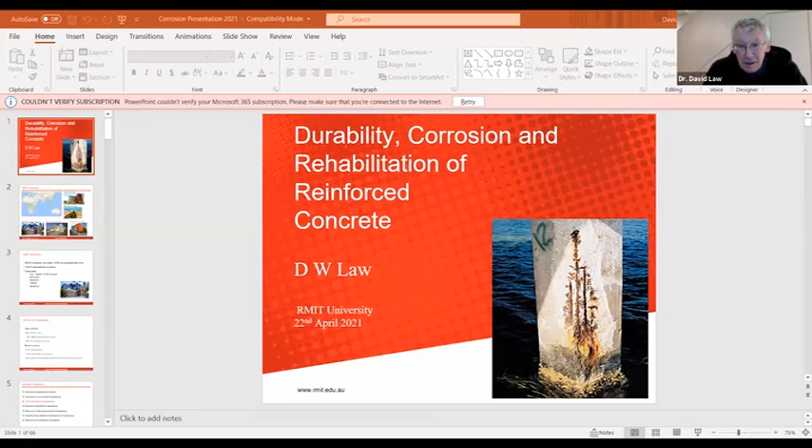Yeah, there we go. Yes.

So what I was going to talk about today is the work that I've done, both in industry, where I've worked in the UK and in Australia for a number of companies, looking at durability and corrosion issues for reinforced concrete primarily, and that's what I'll talk about today.

I'll talk a little bit about some of my experiences on those structures and the inspection of those structures, what is corrosion and what are the factors that affect it, and also a little bit about the research we've been doing, in particular at the end focusing on a current project where we're doing a lot of work looking at cathodic protection systems, many of which are now coming towards the end of their design lives, having started in the 80s and 90s.

Indeed, that's really why I'm working in this area, being more of an electrochemist, looking at corrosion and durability, and also the design and installation of ICCP systems in the early 90s in the UK.

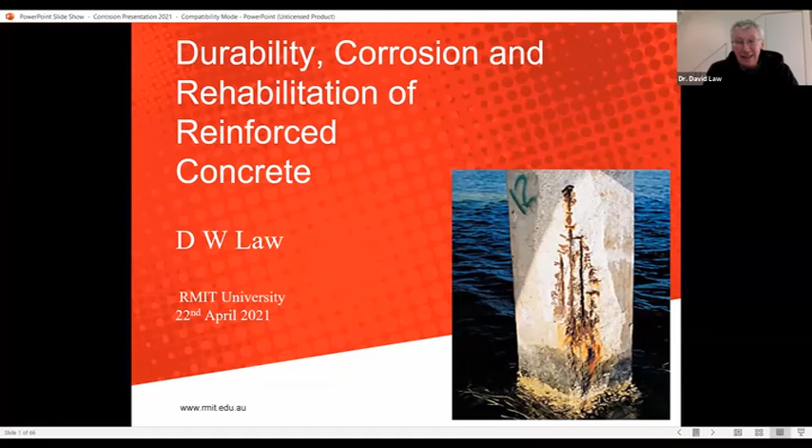So just to give people a little bit of an idea about RMIT University, we're based down in Melbourne, in Australia, though I'm actually British and from the UK, and have worked at Heriot-Watt in Edinburgh, which was my last university, and before that at Liverpool University.

RMIT has 3 campuses in Melbourne. We've got the main city campus, which is where our offices and classes are held, and we then have Bundoora campus, which is where our laboratories are held, and then we have another campus, the Brunswick campus, which is more for the arts and textiles area.

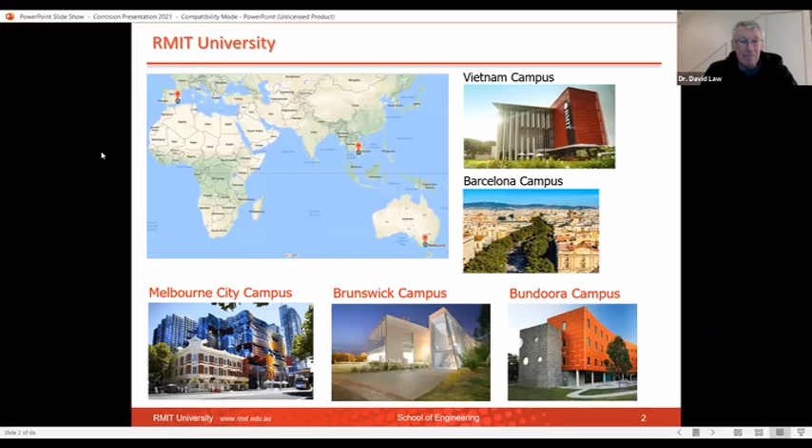We also have campuses in Vietnam and Barcelona, where we've also done some collaborative research with them. We have about 84,000 students, including 12,000 postgraduate in both research and taught, and we had 12,000 international students.

I'm not quite sure, given the current situation, what the numbers are actually like after this year's intake, but hopefully we will be back at those numbers relatively soon. The majority of these students are based on our city campus, which accounts for about 45,000 of the students. Within civil engineering, we have about 300 to 350 in each of our 4 years of our courses.

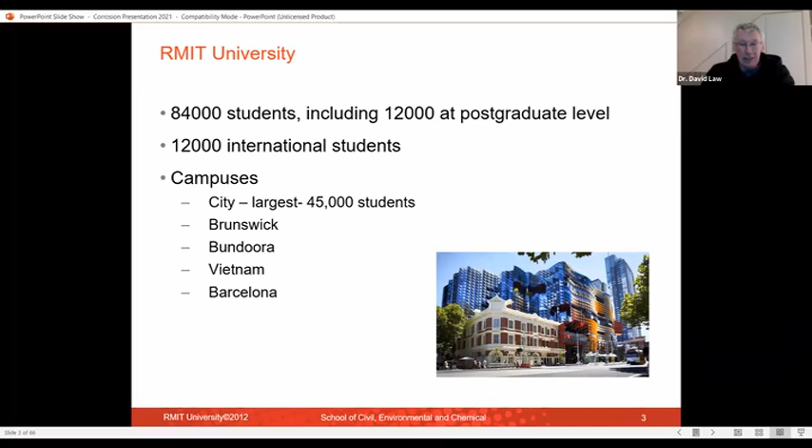Within the School of Engineering itself, which goes across a large number of different engineering profiles, we had 289, so nearly 300 academic staff, producing around 600 Q1 publications a year, with just under 5,000 undergraduates, and about 1,279 coursework postgraduates, and around 580 HDR students, the majority in PhDs. In civil, we have probably around 150 PhD and Masters by Research students.

I have, I think, 11 currently working with me, and a couple in the process of writing up at the moment. These are the academic disciplines within engineering, and I'm particularly in the civil and infrastructure engineering area.

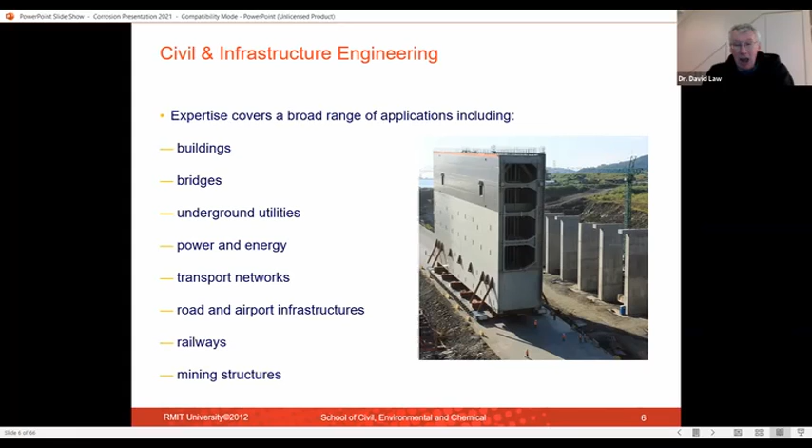But I do some collaborative work, particularly with the chemical and environmental engineering group. Within the expertise that we deal with at RMIT, we look at pretty much all types of structures. We're also very interested in power and energy, transport networks, and mining structures. In particular, I would say buildings, bridges, mining, and road are the main ones that I deal with within my research, from the area of durability, corrosion, and long-term performance.

So what I'm going to focus on is our corrosion and durability research at RMIT. I'll start off talking a little bit about the corrosion processes and how corrosion is initiated, particularly focusing on chloride-induced corrosion.

Then I'll look at some of the measurement techniques and testing that we have, in particular things like linear polarization measurements and laser scanning. We'll then talk a little bit more about corrosion and bond as well, and then I'll move on to focus on electrochemical protection with cathodic protection.

So why are we particularly interested in corrosion? Well, in the extreme cases, we can have major failures. And you may remember the Genoa Bridge that collapsed a couple of years ago, when there were a number of fatalities. And there have been other collapses, Minneapolis Bridge about 10 years earlier.

And we have issues with the Forth Road Bridge, where I used to be in Edinburgh. Major corrosion of the suspension cables led to having to construct a new bridge, which was opened in 2017, because of the potential disruption if that bridge was shut and there was perhaps a 50-mile detour required because it was shut.

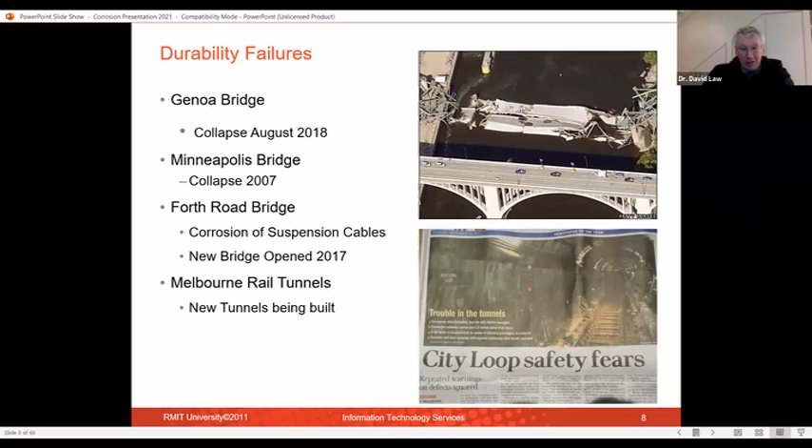So we're looking at this because we need to maintain this infrastructure. And if we have failures in this infrastructure, it's going to be a major cost to the repair, but also the disruption, even if there are no fatalities.

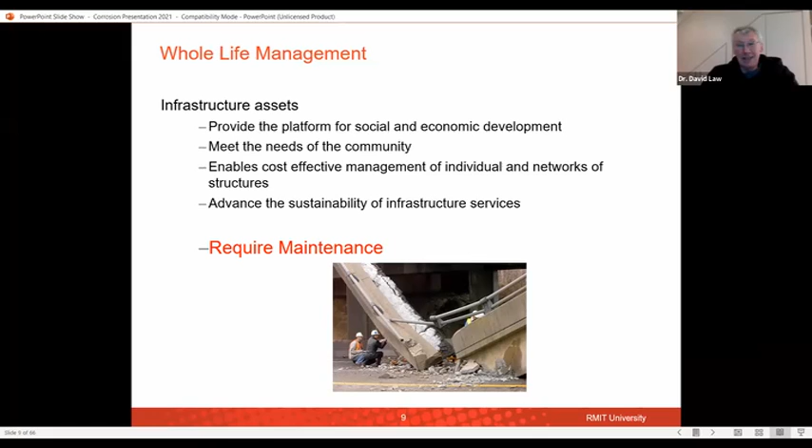The illustration there was a collapse overnight due to corrosion in the bridge, which had been caused by de-icing salts being applied on the surface, not an issue that you would have in Sri Lanka, but obviously in Sri Lanka there are other issues with it being an island and much of the infrastructure built in a marine environment where you've got the chlorides that can get in and cause deterioration. And higher temperatures and high humidities can also drive that corrosion even faster.

And it costs a lot of money. There was a survey in the USA in 1982 that identified 15% of all the bridges at that time, which was over 500,000, were structurally deficient. And the estimated repair costs were 8.3 billion a year, equivalent to 0.1% of GDP. And that hasn't really changed much in the last 30 years.

There was recently a study done in Sweden, and that estimated the repair costs were 0.08% of GDP. So those repair costs are staying fairly constant, but things have the potential to get considerably worse. At the moment, approximately 40% of the bridges are over 50 years old, the age where we might expect durability to be a problem. By 2050, that will have risen to 75%. So that is going to be an awful lot of money that will have to be spent.

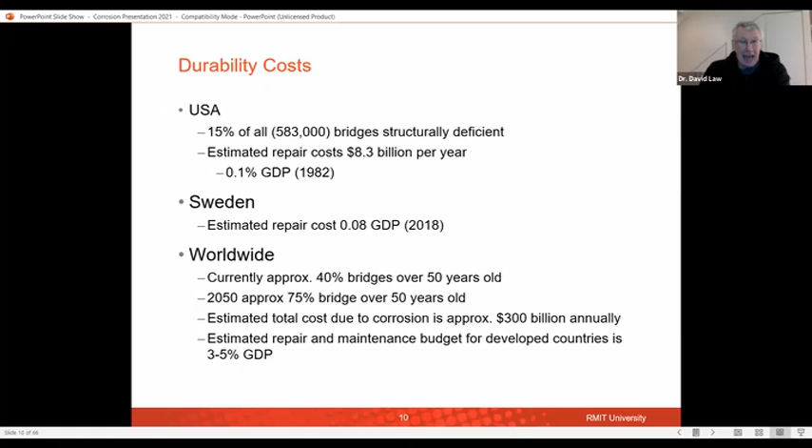And it's estimated that if we extrapolate this to all structures, we're looking at around $300 billion annually worldwide. And in most developed countries, I expect this to be around 3 to 5% of GDP for all those structures.

And here is another example where we've got durability failure of steel pipes, mainly water pipes. In the US, it's expected that might be 1 trillion over the next 25 years. In Australia, we have estimates of just under 125 million over that same period. And these leaks, which might seem small at the start, can progress to what we see in the image below if they get out of control.

And with a lot of this durability, it's very difficult to see what's happening because it's steel that may be buried, it's steel that's within concrete. How are you going to be able to test this? How can you repair it? And how can you design for it? Indeed, the selection of your concrete, your concrete mixes and the cover depths is very important in how you're going to try and prevent these failures.

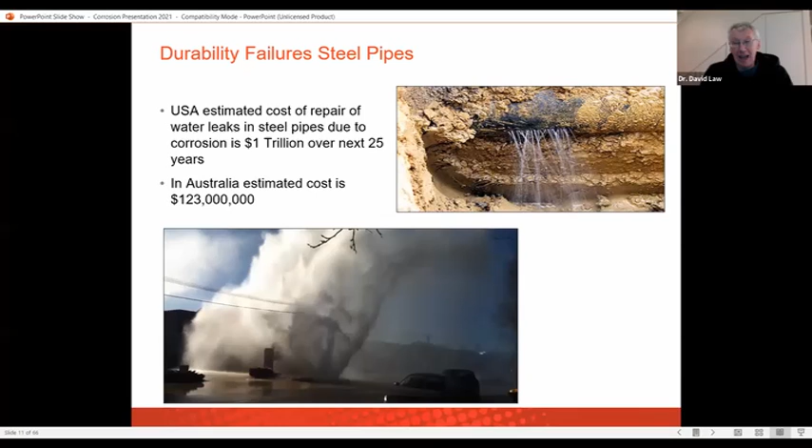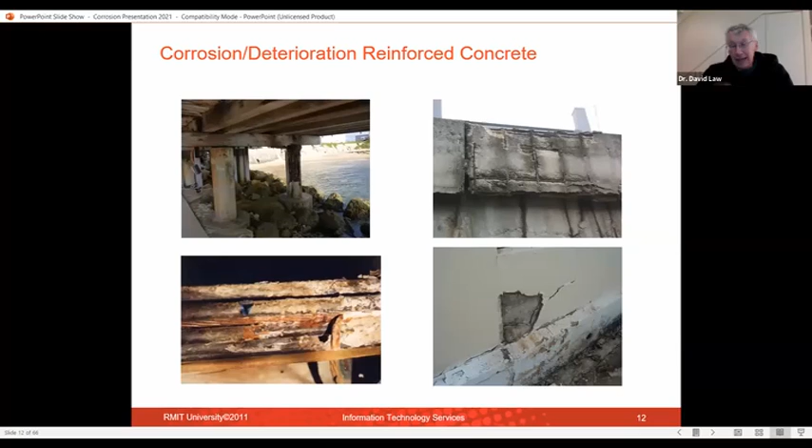This is the sort of thing that you see on old structures, and I've got some examples here of what happens when you have corrosion of your reinforcement. The top one here is a marine structure. This is actually a bridge in Central Europe, and that's due to de-icing salts again. The bottom one is also on a bridge, and is due to water leaks that are coming through and initiating the corrosion inside the concrete.

So how does chloride get into our concrete? Our chloride may come from de-icing salt or from seawater, and it will slowly diffuse into our concrete. That is, it will come into the pore water within our concrete, and it will diffuse under the concentration gradient of chloride ions until it reaches the steel bar. And once it reaches the steel bar, you will get corrosion initiated.

And thus, the protection that you've got is your concrete. You've got the distance, the cover depth, and the density or compaction, the porosity in that matrix, because it will diffuse through the interconnected pores and the pore water. So that is how you can try and design out chloride attack. But when the chloride ions come in, they will reach a concentration at the steel rebar that will initiate corrosion.

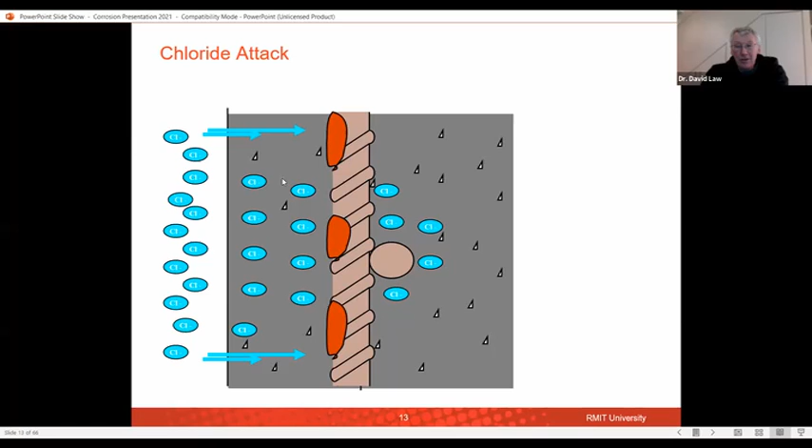And this is what happens. You set up an electrochemical cell. You have an anode, and that's where your iron dissolves from your steel. So your Fe goes to your Fe2+, and you have 4 electrons generated. And these move along the rebar to an area on the bar that we would term the cathode.

And here that reacts with water and oxygen to form hydroxyl ions. And thus we need both water and we need oxygen at the bar for that reaction to occur. And then these hydroxyl ions will be transported through and create the full circuit. They will meet the ions that have dissolved, and we get iron hydroxide forms. This then changes into the rust, and you see that typical orange rust that you see on the surface.

This occupies a larger volume than the steel, because the steel is now combined with our oxygens or our hydroxyls, and so it puts a stress on the inside of the concrete, and so the concrete will collapse. And you will get cracks, you will get spalls, and you will get failure of your concrete. And that is how our steel corrosion is initiated when we have our chlorides.

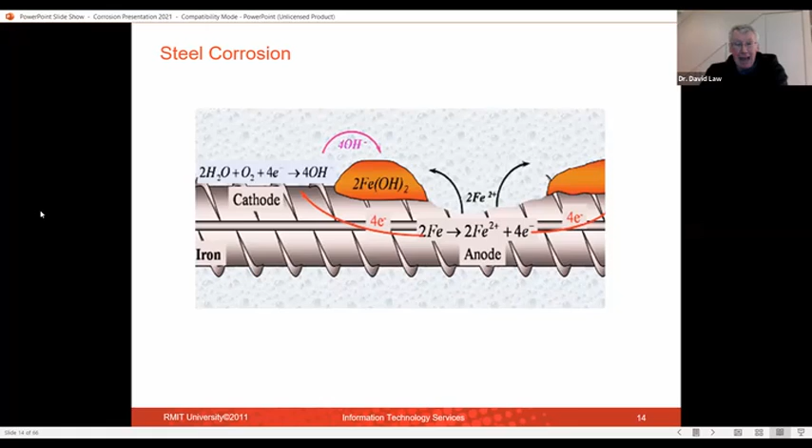And why does it happen? Well, this is a Pourbaix diagram. And when we have our normal concrete and our pH, we are in sort of this pH 10 to 12, 13 zone, and that is where we get passivity. That is, we will have an iron oxide film formed on the surface of our steel, and it will protect our steel because of the pH that we're at.

However, if we have a drop in our pH, or we have chloride ions coming into the system, we move from a passive region into an actively corroding region. And so that is why we start to get corrosion. As the chloride ions increase, or the pH drops, which happens when we have carbonation attack, and that neutralizes our pH in the concrete, we move into our corroding area. And that's where our Fe wants to move to our Fe2+. And so that is a problem that we've got.

And while I'm here, just to mention, you've got this area of immunity. And you can see these are at very low potentials. So when we have a steel potential and it's passive, it's generally in the region, say, minus 100, 200 millivolts. When we move into the active corroding region, we're moving down into lower millivolts, which are generally 300, 400, 500 millivolts. But if we get to very low potentials, we actually get immunity. And this is what we do with cathodic protection that I'll come back to at the end.

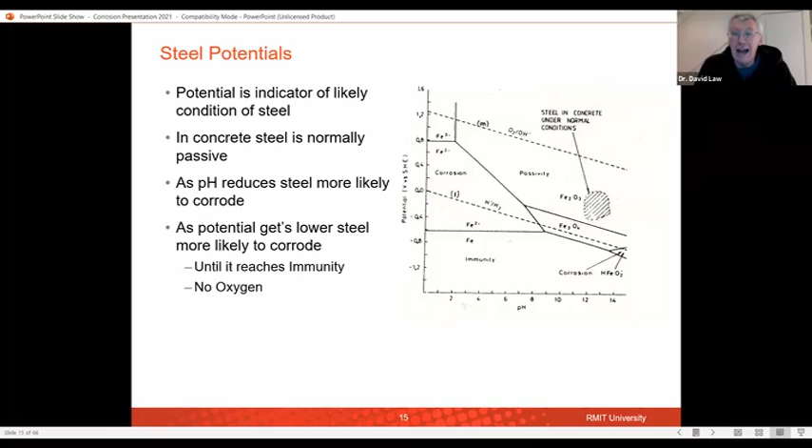And it's that steel section that provides the structural support. And so you're far more likely to have those failures with chloride attack than perhaps you would see with carbonation attack. And when you've got this corrosion, these cracks form. And so if you have beams, the cracks tend to come out at the corners, and the concrete falls off, you have spalls, and you get exposure of your steel, which can then corrode faster.

When you've got slabs, it can quite often be that you'll see the bars will connect up with those cracks, and you get larger, flatter areas of spalls coming off, and that might be in the soffit, or it might be when you've got the slab on a bridge deck coming off with them.

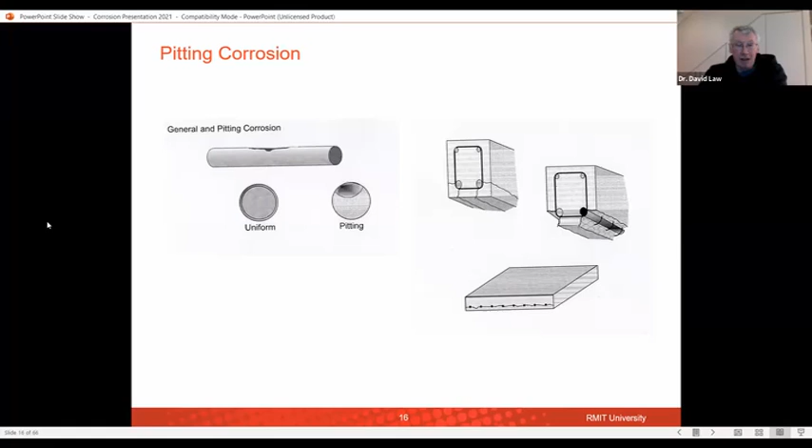But I said it's this pitting corrosion that is a real problem when you've got chloride-induced corrosion. So how do we go about assessing this? How do we know what's happening at our steel if we can't see it because of the concrete?

Well, we can look at what's called half-cell potentials. That is, we can look at what that steel potential is that we talked about in the Pourbaix diagram. And from that, it will give us an idea of whether it's passive or whether it's corroding. We can do what are called linear polarization resistance corrosion rate measurements. We can get an instantaneous rate of corrosion.

We can also look at resistivity. What's the resistivity of our concrete? If we've got a lot of chloride ions in there, the resistivity will drop. If it's very damp, if it's moist, the resistivity will drop. And we can also look at what is the chloride diffusion coefficient? What's the rate that our chlorides are coming in through our concrete?

And one of the things that we do when we have a mix design, we want to have a chloride diffusion coefficient for that concrete that is very low, which means that if we have a set thickness with that chloride diffusion coefficient, the chloride ions are not going to reach our steel within our design life. And to do that, we can use some predictive modeling to see whether it's going to reach our steel, and we can design to try and ensure it doesn't reach our steel.

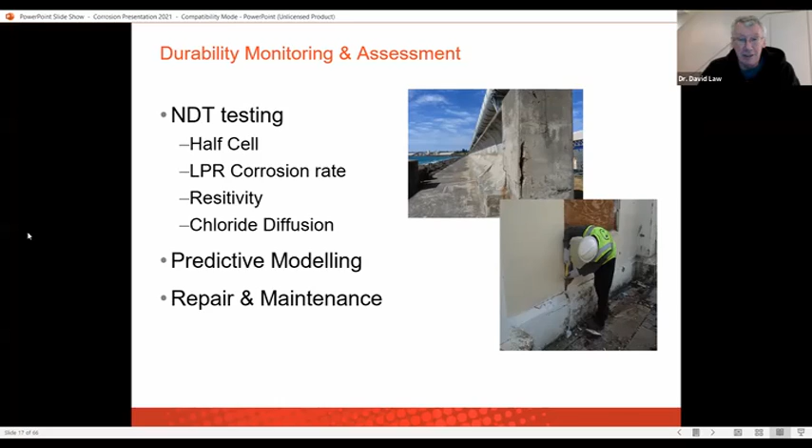But sometimes it does, particularly as structures age or the exposure environment is actually more aggressive than we thought, or it can even change. And so we need to think about how we're going to repair and maintain these structures. Well, for those techniques, the most common technique is to do a half-cell survey.

And to do this, we would have a half cell. That is a standard electrode that we are going to use to measure the condition of the steel. Generally, when we're doing it on the surface, like these guys here, we would use a copper sulfate electrode because it's pretty robust, so it can take the knocks, and it will give you a pretty good idea of what's going on, perhaps plus or minus 5 millivolts in accuracy.

If we want to monitor this over a long period, though, we may well want to actually install an electrode in the concrete and see what's going to happen over a number of years, perhaps 20, 30 years even. And for this, we can use things like silver chloride or manganese oxide electrodes that are more stable and will last longer inside our concrete, whereas our copper sulfate will not last that long because it will dry out if we try to install it inside our concrete.

To do these surveys, we need to have a connection to the steel. So that may well mean that we need to break out with a drill or a hammer to the steel and make a connection to that. We then need to set up a grid on the surface so we can record it at set points. And we can see the people are putting them on at these set points on the grid, so we can build up a contour map. And we take points along there.

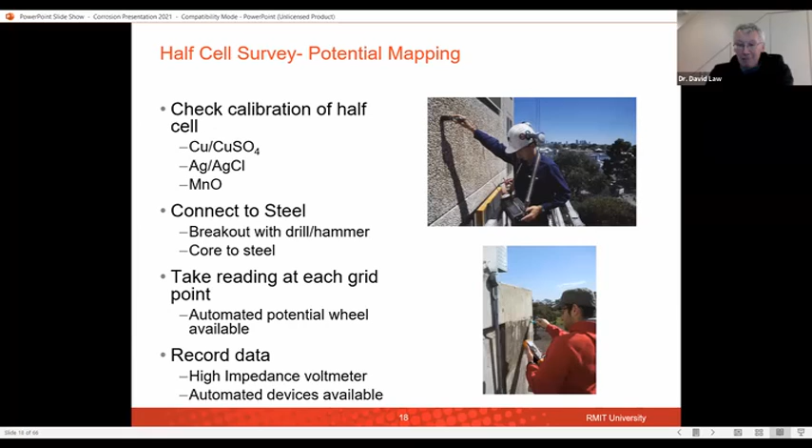You can get potential wheels, but it needs a fairly flat surface to be able to roll it along. And you also need to use a high impedance voltmeter, or you can get some of these automated devices, such as the one at the top, where it just records each time it's put on the surface. At the bottom, these were some of my research students, and they would read out the number and someone would write it down to produce that information.

And then we get these contour maps. And you can see here, we've got these green zones where the potentials are more likely to be in the passive range. And then we've got these red and yellow zones where they're more likely to be in the active range. And thus the green is probably the cathode, and the red and the yellow are where we've got anodes. And if we can't see any cracks or rust yet, we're suspicious that we actually have got corrosion going on.

And so these are the areas that we might want to look at in more detail to measure the corrosion rates and see how fast that steel is actually corroding and whether we can do anything about it. And we can look at these with a set of criteria that relate the steel potential to the likelihood of corrosion that are called the Van Daveer criteria.

We can look at the shape of these corrosion plots. If they're all of the same sort of potential, then it's likely there's no corrosion occurring. But when we've got these big contours that go from green to red and yellow very close together, then it probably does mean that we've got corrosion there.

And we're also looking at those environmental conditions. In Australia, for example, if you're at the end of summer when it's been very dry, there'll probably be no corrosion because there's no moisture or little moisture. Equally, if it gets in the monsoon season, there'll probably be no corrosion because there's no oxygen present. So you need to think about, well, what's the environmental condition when I'm taking these readings?

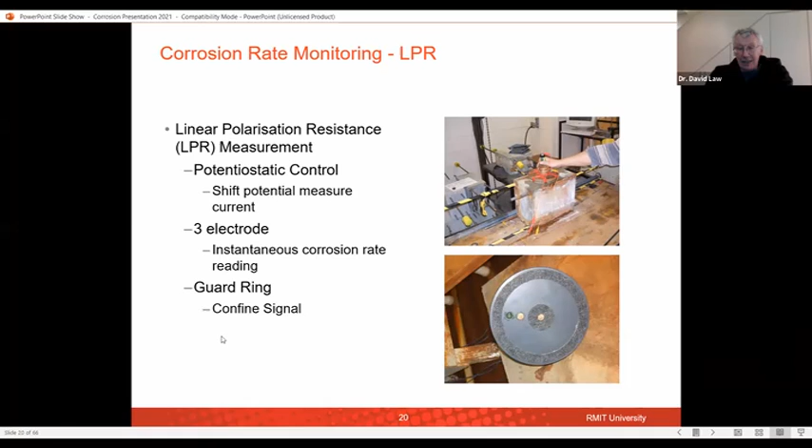The linear polarization resistance is a method of actually determining the corrosion rate. This looks at changing the potential and measuring the current when you change the potential. You can have a 3-electrode system, which is the most common, and I'll talk about. You can also have a guard ring, the bottom one, which has 2 extra electrodes to see that the potential that you're changing is not going outside a certain area, so you know the area of steel that you're dealing with. In general, these days a 3-electrode system is more normal, but you can use guard ring systems to ensure that you've got a set area of steel that you're measuring.

This then is how a 3-electrode system works. You've got your reference electrode. In this case, we've got silver chloride, but you can use a copper sulfate. We've got the steel, which is connected, and that's termed the working electrode, because that is the one that the work is done on. And we then have an auxiliary electrode, which will apply the perturbation to move the steel potential. That will apply a small current that will shift the steel potential by a set amount. And we then measure the current response as it returns to its equilibrium potential.

For the auxiliary electrode, we need a conductive foam to get a good contact, and we will generally use a brass plate that is less likely to corrode and will be more long-lived, but you could use any metal there if you wanted to.

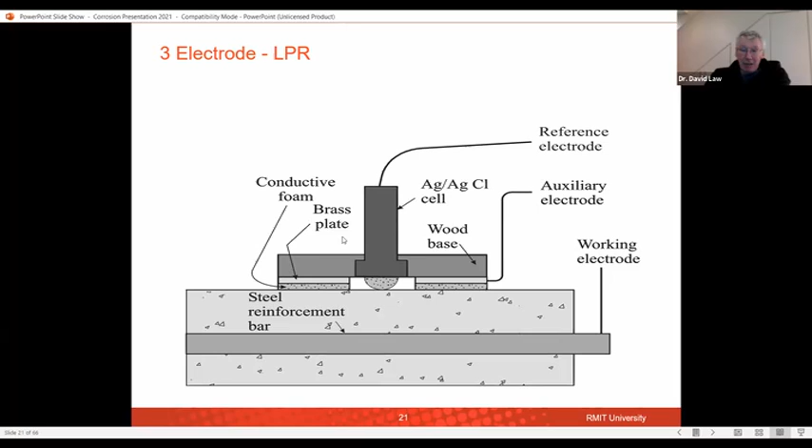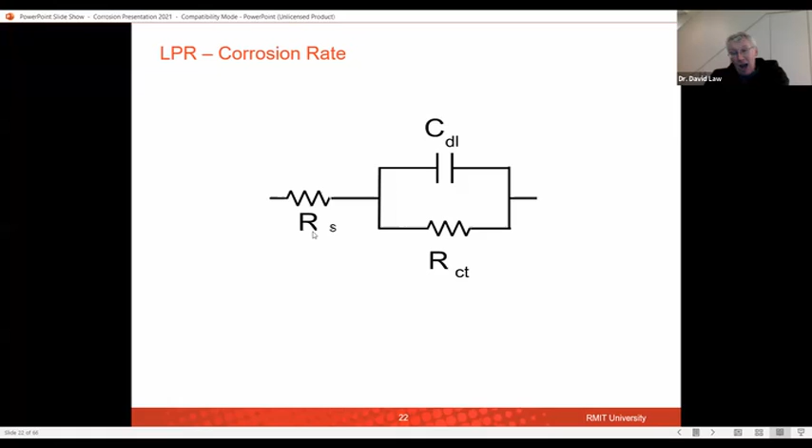And so you can actually measure this with your LPR, because it will measure the 2 resistances added together. But because you have a capacitance here, if you use an AC impedance measurement, you can short that out. So you will just measure your solution resistance, because it will go along this side of the circuit with no capacitance and not go through the RCT resistor. So you can measure your RS, and your RS plus RCT using this LPR technique.

And here you can see me in the days when I was working for AECOM in Australia, undertaking a sort of corrosion rate measurement. So what we did, we've done a cover survey, we've made a connection to the steel, we've done a half cell survey and identified those negative points, and now we're going to do a corrosion rate measurement on that.

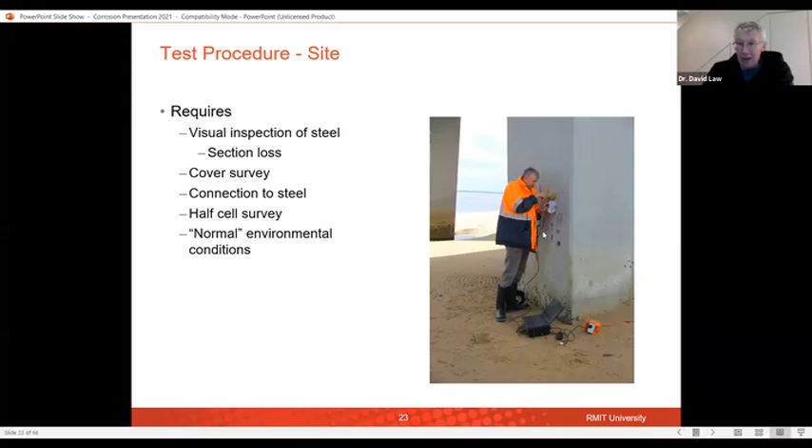At that point, you can see the tide comes in. It doesn't actually come up quite that high, but it's in a very aggressive environment because you will get the moisture, you'll get some spray and some splash, but it'll also be drawn up by capillary action. So this is a very aggressive location.

And this is what will happen. So we're going along and the steel is sitting happily at its normal steel potential. And then you change the potential up and you change the potential down by applying that current from the auxiliary electrode. And over time, you'll get a charging up of that double layer capacitance. And when that's charged up over time, it will reach an equilibrium point.

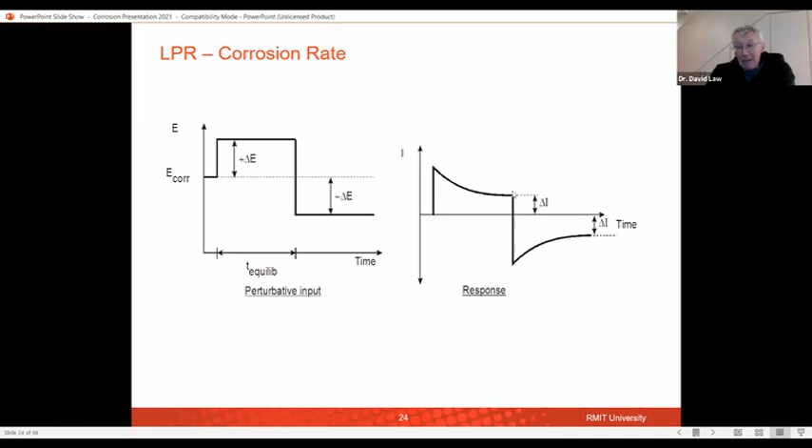And so you've got your delta I, the current that relates to your solution resistance and your charge transfer resistance. You know your delta I and you know your delta E, and we know that V equals IR. So we can calculate our polarization resistance, delta E over delta I.

And we also know that we can calculate our solution resistance separately. So if we subtract our solution resistance from our polarization resistance, we will be left with our RCT, the resistance that relates to our corrosion at the moment we took it. We then can correlate that with our corrosion rate using a constant, which is the Tafel constant.

And if we then divide that instantaneous corrosion rate by the area of bar underneath it, and that's why you sometimes use that guard ring, we can then calculate our corrosion current density. And from our corrosion current density, we can then use the Faraday equation to calculate how much section loss we're getting in our steel per year. And thus we can see how much steel we're actually losing per year.

And so we can see how long before we will actually get structural concerns about that steel. And that, as I said, is the Faraday equation. We've got the atomic weight of iron, the density of steel. We know it's 2 plus because it's Fe to Fe2+, and we've got our Faraday constant.

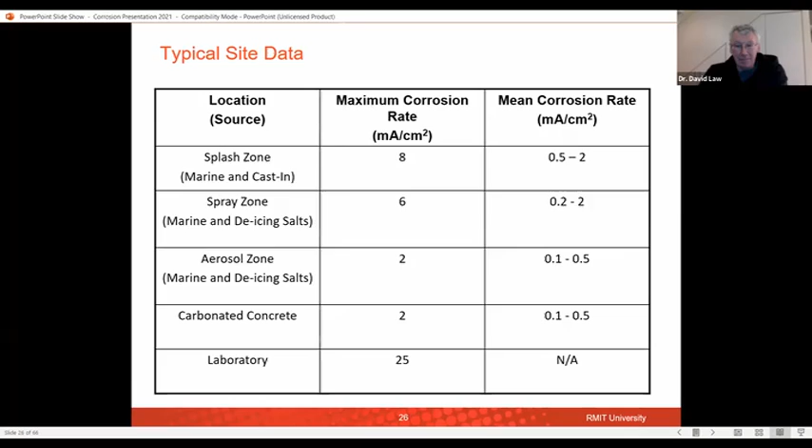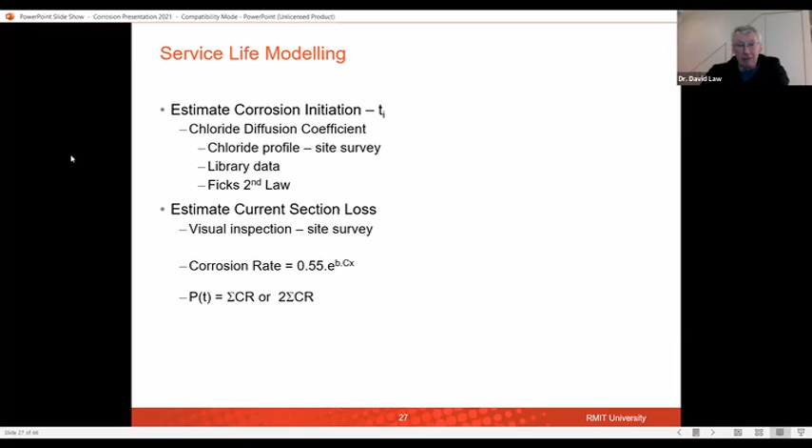So this is how we can go through and estimate our section losses, and our corrosion rate can then be correlated to how much we lose over a longer period of time. So there are various ways that we can then go forward to estimate the service life of our structure based on the information that we get from our corrosion rates.

And thus, in the end, we can get actually to our residual section, which is the main thing we're interested in. And so this is the residual section of our steel that is related to our penetration depth. So we can get what we say is our time to cracking, and we can get, most importantly, that time to failure that we can try and estimate from our corrosion rate measurements.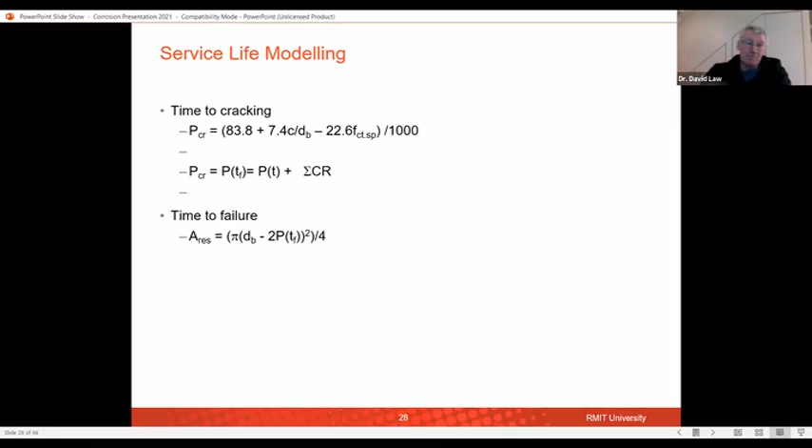Another interesting technique we've been using is to look with a laser scanner to try and detect deterioration on a structure. We had a block that we put in the laboratory, and we're actually corroding this by applying a current to make it corrode faster and spraying it. We are monitoring over time using a terrestrial laser scanner.

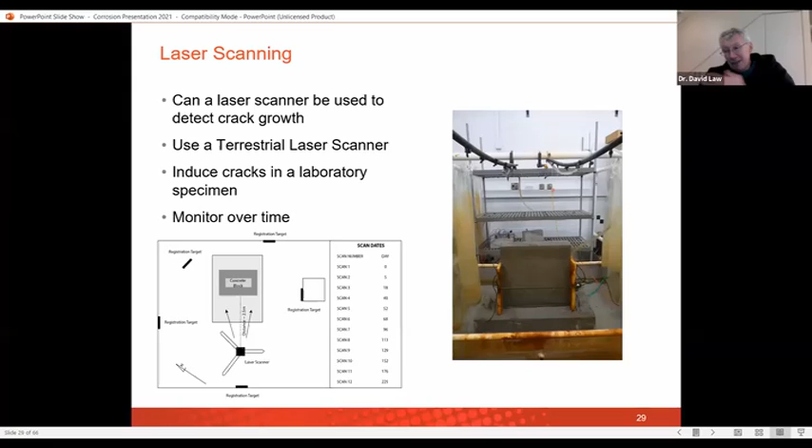We also went down and scanned a seawall to see what was happening on a real structure. We did this because we wanted to get the data in a shorter period of time. We did the scanning over a 2-year period, but it's still ongoing now. It's been going about 5 years, and we occasionally go down and deal with this.

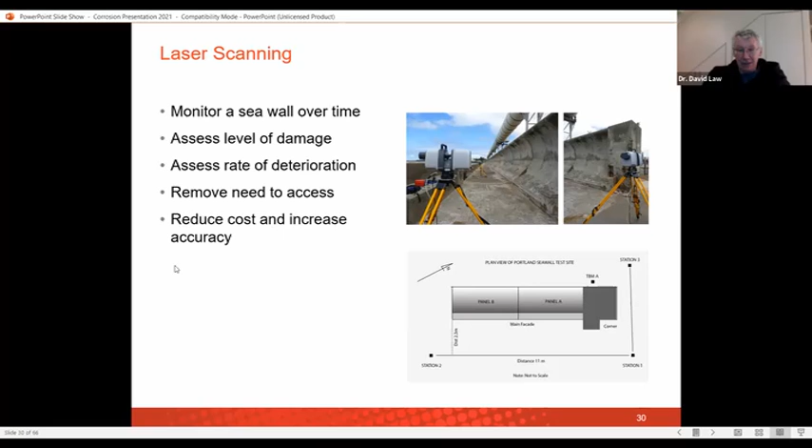The idea being that if you can scan it, we're getting reasonably close, but you may be able to do these scans from a long way away. So you don't have to go and actually do the visual inspection where you get right up to a structure. You can simply do these scans from a distance, or even these days use a drone to do these scans.

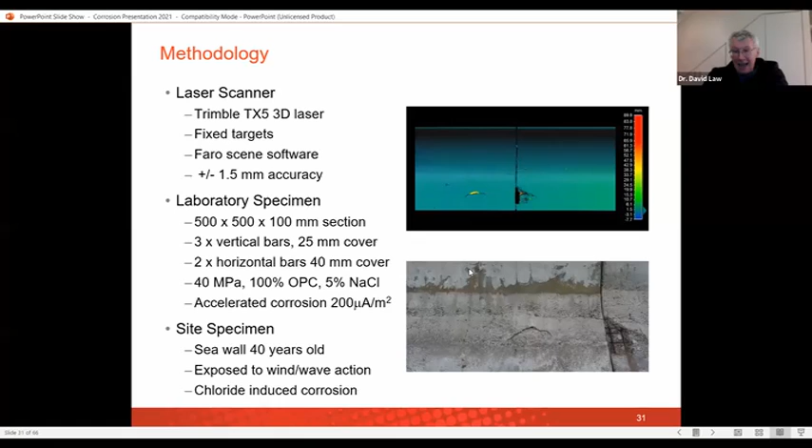So it can reduce the cost and hopefully increase the accuracy. These are some of the data that we had. We had a set of bars in our laboratory specimen, put in 5% sodium chloride, and accelerated our corrosion with 200 microamps per meter squared. That seawall was 40 years old, and it's got quite bad chloride-induced corrosion in it.

Thus, we were able to do a set of scans, and you can see here where we can use the resolution of our laser scanner to pick up the crack patterns that we got on the blocks themselves. You can see here this is what it looked like in the lab, and this is how we can enhance it using our laser scanner.

What we found is that we needed the cracks to get to about 0.5 millimeters before we could really follow them with the laser scanner. This is because with very small cracks, the laser scanner was getting lost and not being bounced back accurately enough to be able to see them. But once they got to 0.5, then we could produce these maps that we could see. This is a very good way of seeing where the cracks are, and we can then monitor the crack growth over time using this technique.

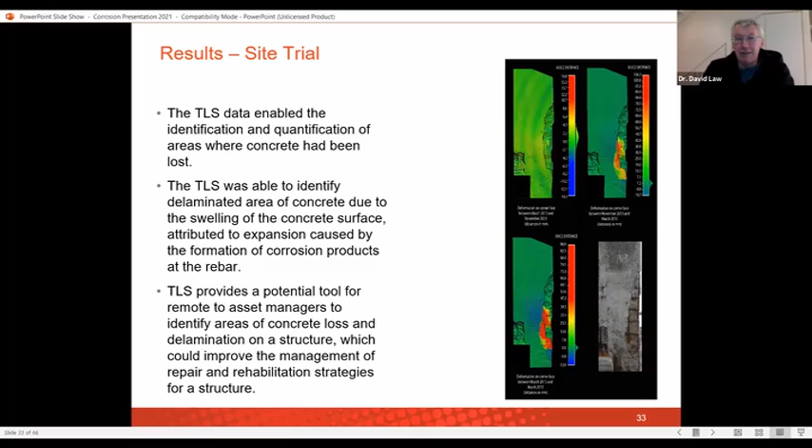So another thing that we've been looking at is what happens with the corrosion and that bond to the steel.

We're very interested in the bond of the steel, because it's that composite action that gives strength to your structure and the capacity remaining. We're interested in whether there's a relationship between crack width and bond. Because if we can monitor the cracks, we might be able to understand how much bond we're actually losing within the structure.

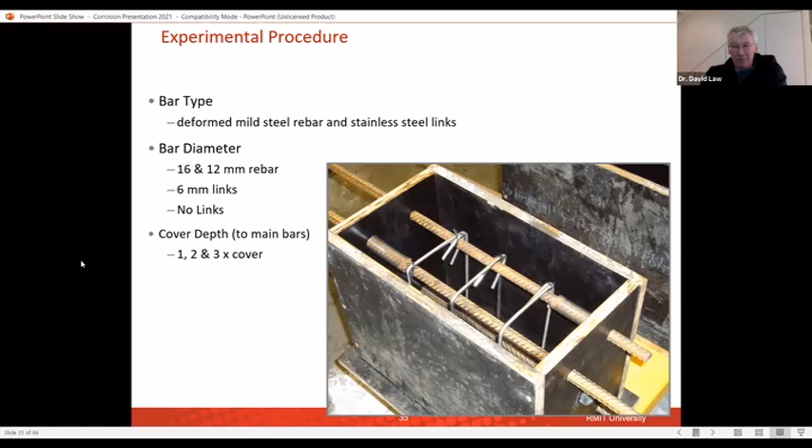We looked at a range of cover depths of 1, 2, and 3 times the cover of the bars over a large set of specimens. We would then clean the bars so we could see how much mass loss we were getting out of them. This would then be accelerating the corrosion within the bars, and so we would have these bars wired up, and we would be able to do pull-outs of the bars.

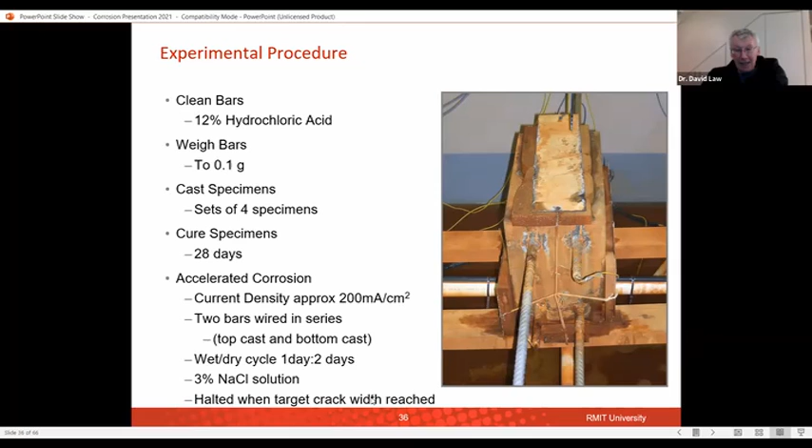We had them with the long bars opposite so we could fit them in the machine. If we had all 4 bars in, we couldn't fit them in the machine to pull them all out. In this case, we cast them with 3% sodium chloride, and we had wet-dry cycles running for 1 day wet, 2 days dry, and we would stop these at specific crack widths to test what the bond was on them.

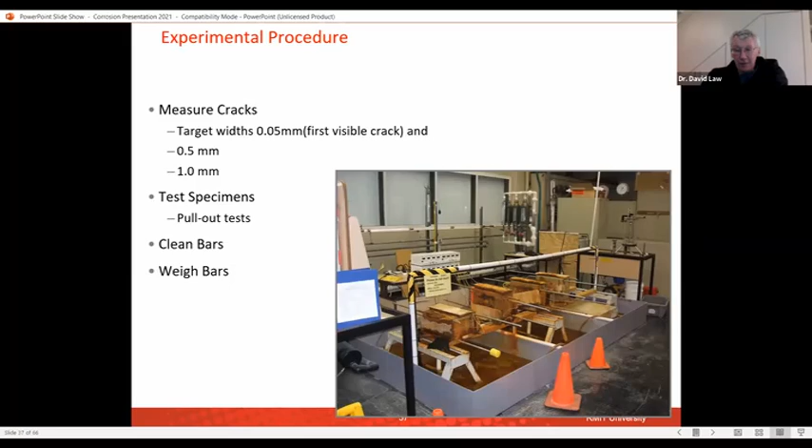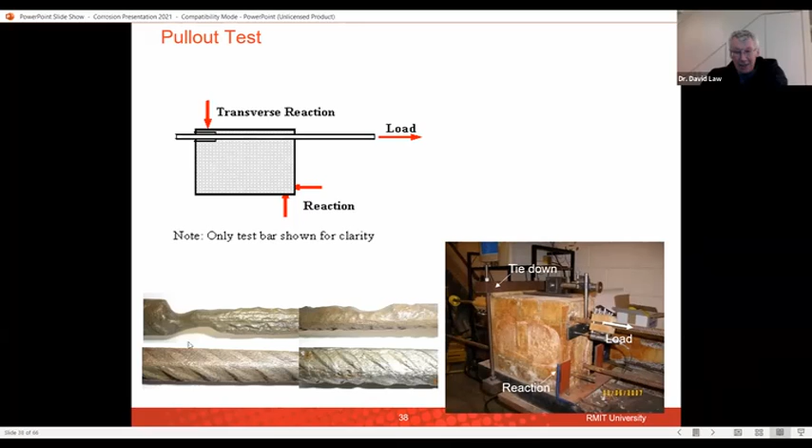This is how we would do the test. So they're clamped, but we've got that bond breaker here to make sure there's no reaction, and we pull them out in a perpendicular direction, and this shows you the section of some of the bars that we took out.

Here, typically after cracking, after bond failure, we get these cracks, and here we have another one where it comes straight out, where we've just got the longitudinal cracking. This was typical for unconfined. This was typical for confined, as you might expect.

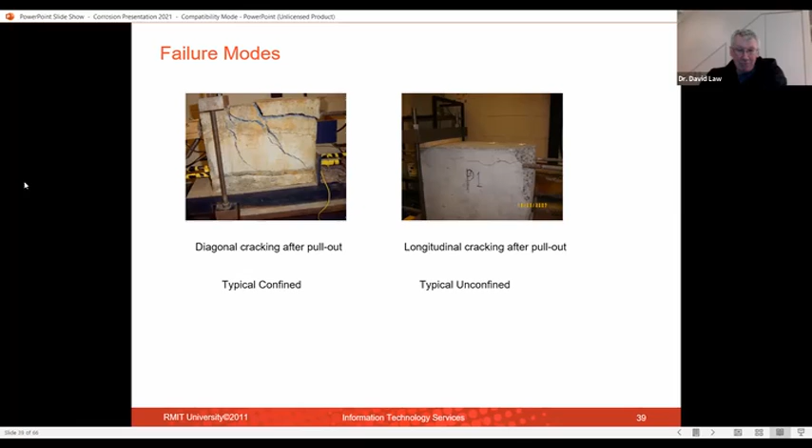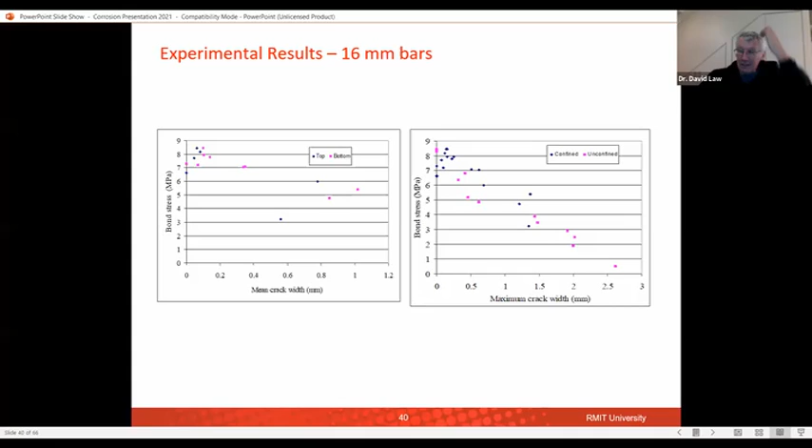You can see here, this was the mean crack width, and this was the maximum crack width, and again the maximum crack width gave us a better relationship than mean crack width on that deterioration. So there was a suggestion, and this is still ongoing research, but simply by being able to monitor and measure those crack widths, we will get an understanding as well as to how we're losing bond from the bars.

So the final bit of work I was going to talk to you about is the cathodic protection systems that are used to rehabilitate structures. This would be, I would say, the most common method of rehabilitating chloride-induced corrosion on structures. There are 3 different types of cathodic protection.

There is the impressed current cathodic protection that uses an electrical current to protect them. These are the ones that are most used, and they've been running now for 30, 40 years. These are the ones we've been studying to see, as they're reaching the end of their design lives, whether we're seeing protection left on the structure by the action of this cathodic protection over that long period of time. Because if it is, it means those structures will last longer, and so we don't need to reinstall ICCP, and they may well reach their design lives. Understanding that in the different locations and elements is very important now, as there are a lot of these systems at the end of their design lives.

You can also have the sacrificial anode systems, where you use zinc to protect them. These are easier to replace because you can just add more zinc, or replace the zinc if you need to, but they can have more problems putting in enough protective current to protect your system.

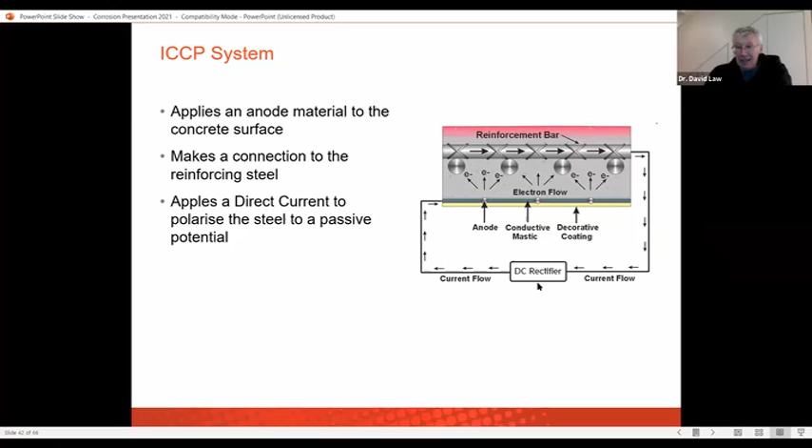If our steel bar is repassivated, it will be a period of time before corrosion is reinitiated. The idea behind the hybrid is that if you've got some zinc, it will then be able to protect it, and you will not lose that passivation now you've got it, for an even longer period of time. But ICCP applies this DC current for a long period of time—these systems run for 20, 30, even 40 years now. When you're talking about hybrid, you're probably talking about 6 to 8 weeks, using large batteries to apply that current.

To be successful, you need to repair all of the spalls and delaminations to ensure that the current circuit can be set up and those anodes on the surface actually work. You also need to make sure that all your steel is connected into the system, or it will corrode if it's not connected. And you also need to make sure that your concrete, both the original and the repairs, allows current to flow. So you don't really want polymer modified concrete in there, because that's going to make it a lot more difficult to actually pass the current through your concrete.

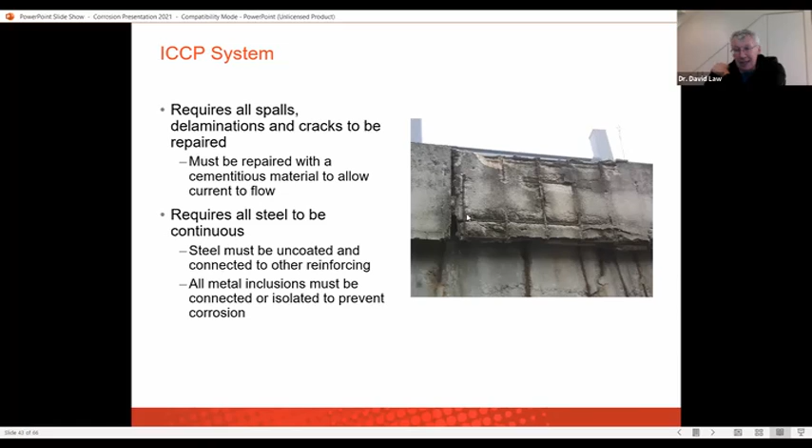And of course, your steel needs to be uncoated. So you can't be looking at this if you've got epoxy coated bars in there. So you work out your total steel area, and then you would typically apply between 2 to 20 milliamps. And when I started this in the late 80s, early 90s, we would rack it up to 20 milliamps and leave it there because we weren't sure it was going to work.

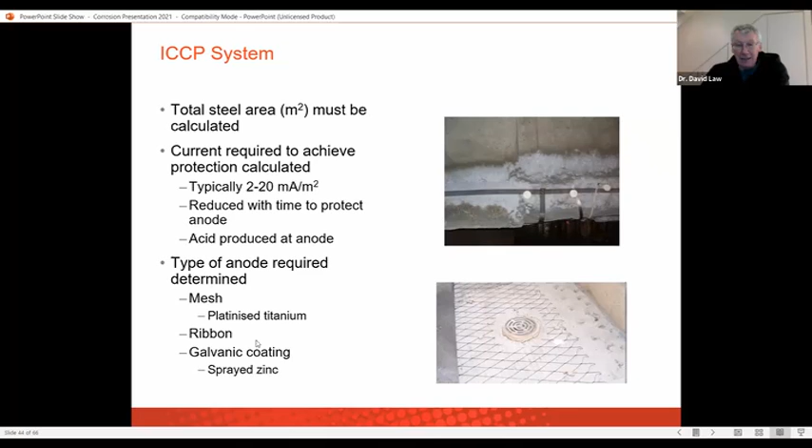So platinized titanium here, and as I said you can also use a galvanic coating or a conductive carbon coating, even as a paint. The mesh, usually you can apply the most current. So if you've got a lot of steel, it'd be mesh. Then you may go down to ribbon, and ribbon obviously can be slotted into quite small areas as well. And then if you don't need too much current, the conductive paints can work quite well.

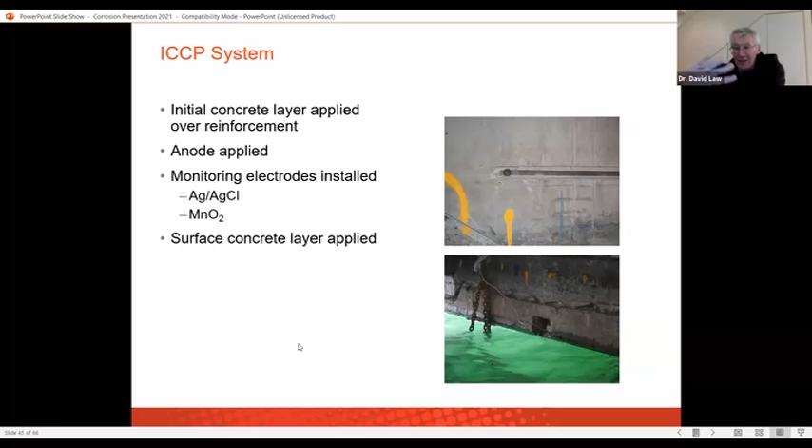You need to make sure that you put concrete over all the reinforcement before you apply the anodes, because if the anode touches the steel, the whole system will short out. So you have to be very careful of that. You put in these monitoring electrodes, and then you would put a surface concrete layer on as well to cover up your anode ribbon and your anode mesh to make sure that it's not on the surface and exposed to the environment, and it's sealed within the system.

You have junction boxes, where you bring all of the connections. So you can see here these ribbons running down here is where you're putting connections on to make sure you've got multiple connections to your anodes, such that if one of those failed, you still maintain the circuit. So you don't just want one or two connections, you want quite a number of connections.

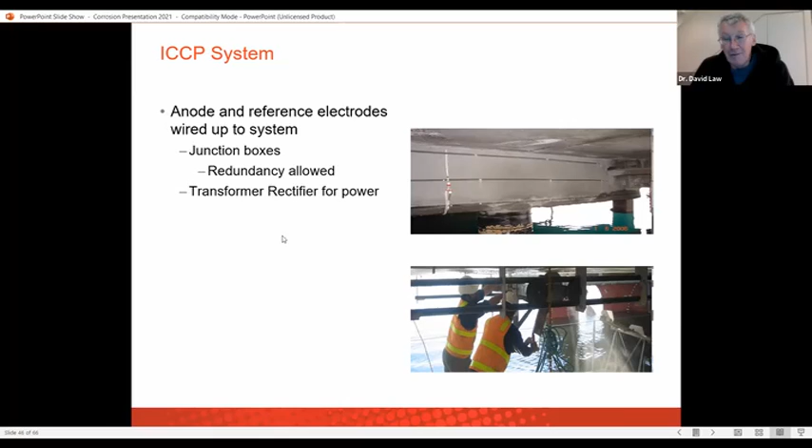You run those back to junction boxes that need to be sealed, because they can quite often be on the bottom of docks, or where you get a lot of splash. You also need to be careful that they can't be vandalized. And you then run them back to your transformer rectifier units, which again need to be in areas where they can't be vandalized. And that is how you set up your systems.

So once we've done that, you've put on that protection, but as we're running towards the end of their lifetime, are we getting any residual protection? And anecdotally, there were suggestions that we are. This has come where we've had fires in the TR units, and so they've been deactivated for a period of time. Sometimes they have to be switched off. Sometimes people even forget to switch them back on again. And so you can have periods when they haven't had the ICCP on the system.

But when people have gone back and looked at them, they've seen that they are still fulfilling the criteria that they are protected. So what we're interested in is what is happening there. Why are they being protected? How long are they being protected? What are the factors that cause that protection?

And if we can quantify this, how long can we say a structure will last after the CP system comes to the end of its useful life? And also, can we then perhaps pulse the systems rather than have them on continually for 40 years? Or, as I've said, how successful will that hybrid be? However, what we've seen is that this isn't seen in all structures, and in particular, they're sometimes affected in tidal areas. So we need to understand what these factors are.

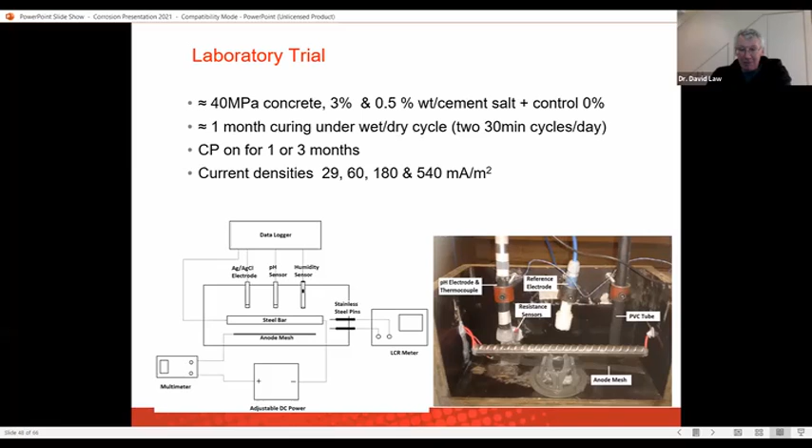3 months of 20 was equivalent to 1 month of 60 of total charge passed. So we could look at whether it was total charge, or whether the buildup of that charge over a period of time was more successful in providing any protection. These are quite short-lived specimens, so obviously they have drawbacks from that, but it's to give us an idea of what we might expect.

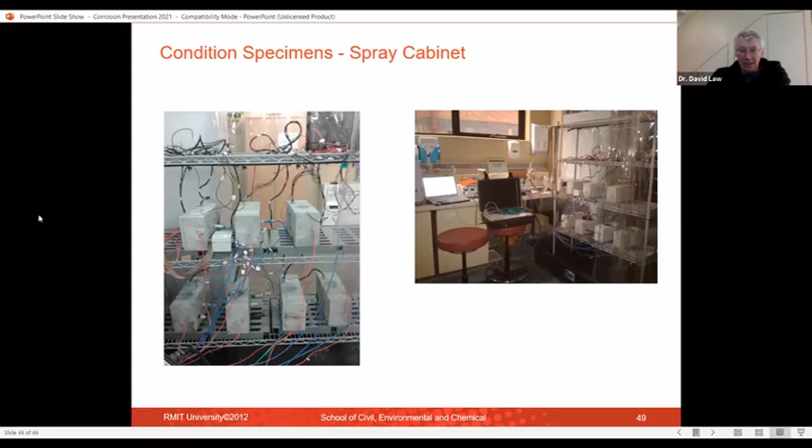Here again, these specimens are being conditioned in a spray cabinet over that period of time. And what we saw with these by plotting are steel potentials. This area at the beginning is what is happening with those potentials before we apply the cathodic protection. You can see that generally they're drifting a little bit more positive as they're passivating after we've cast them, but a few of them we start to see dropping. So some of them were starting to corrode, and most of our 3% specimens we felt were corroding, but most of our 0.5% specimens in these short-term trials had not been able to establish corrosion sufficiently at the time we applied the CP for the student who was doing this work.

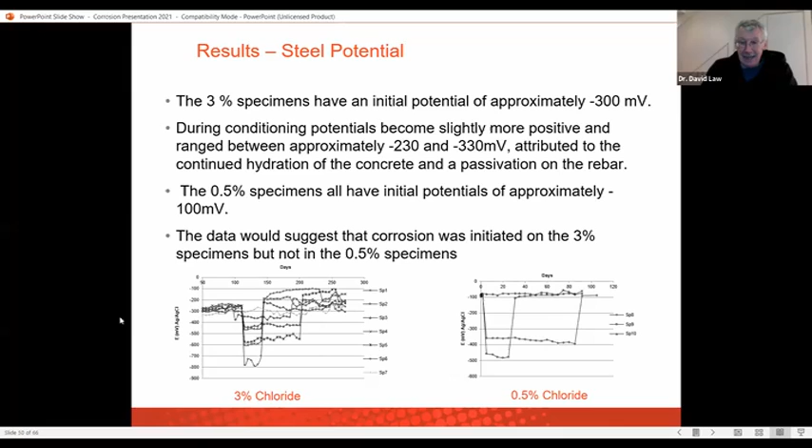We can see here then we have the periods of the 1 month and the 3 months where we applied the cathodic protection, where we're polarizing down to those protective values. Here they come up, and you can see points where we get these drops, where corrosion's been reinitiated. In some cases we can see these fairly obviously. In other cases, even at the end of the trial, they were still drifting up, suggesting that we were still maintaining protection in some of those specimens after the end of the application of the cathodic protection.

So looking at these, here we can see this in a little bit more colour. When we did the testing, these are the criteria to determine if it's protected. We were finding that all the specimens were actually being protected by the cathodic protection when we tested them with their instant off, which is how you check for those. What we also saw, unsurprisingly, is that the 0.5% specimens were giving bigger decay values, so they were showing better protection than our 3% specimens.

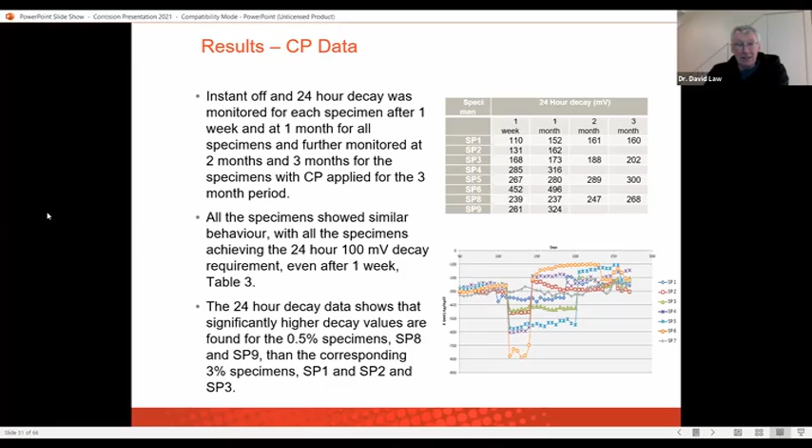We saw that a number of the specimens lost protection over a period of time. Where we've got the 20 milliamps per square metre for the 1 month, we were getting 10 days, but by the time we were going up to some of these larger ones, where we were getting 3 months at 180, we were actually getting 55 days before we had any loss of protection. And indeed, the one where we went to 540, at the end of the 90-day trial we still had protection within them.

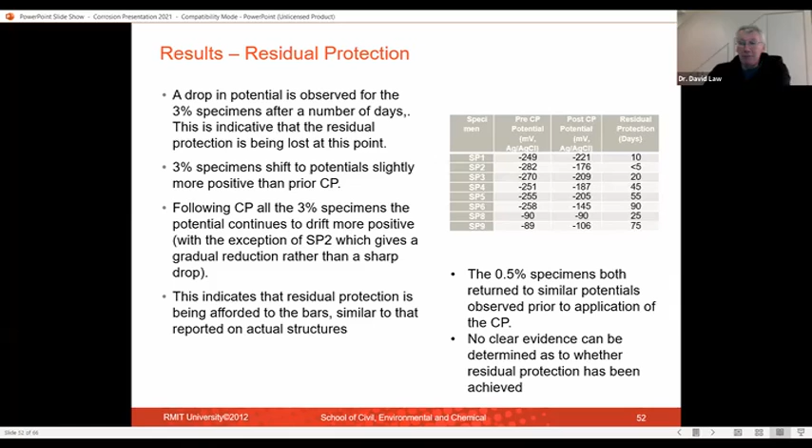So overall, there was no clear evidence as to what was actually causing that, but we were seeing residual protection in all of the bars for a period of time similar to what we'd seen on the actual structures and had been reported. When it came to the length of time and the amount of current passed, however, we saw no clear relationships based on these short-term trials to be able to say that it was the time or the total current that was affording us the better protection.

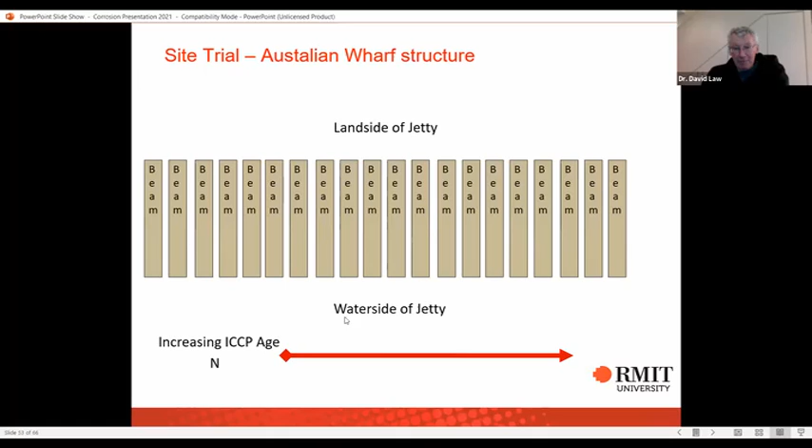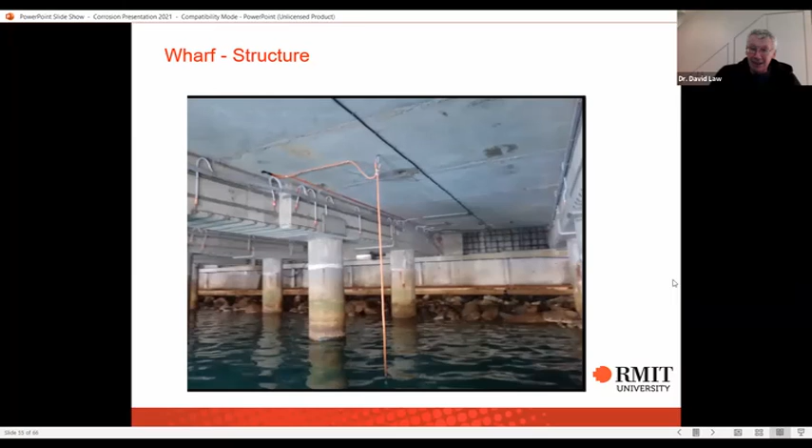So we've been looking at the beams within this, and these beams running down the length of that jetty. And that gives you an idea. So this is the jetty. So we've been looking at these beams that are in particular coming along the jetty, and that jetty has been going sort of out. So we've got one end that is near, as well as it's coming sideways. At one end, we've got the land there, and at the other end, it's more exposed to the ocean.

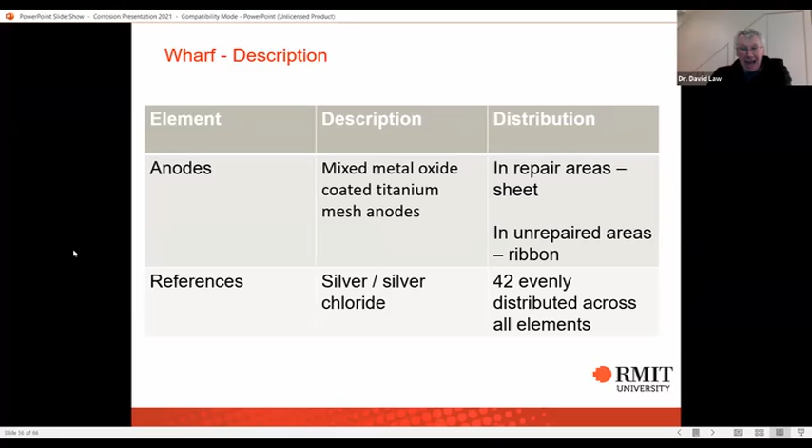This was a sort of mesh anodes, and we had 42 silver chloride reference electrodes we could monitor. And we've got some ribbon anode in there as well. What we would look at from our criteria is this minus 150 millivolts is what's seen as the absolute passive criteria, that they should be more positive than this to be seen as maintaining their passivity.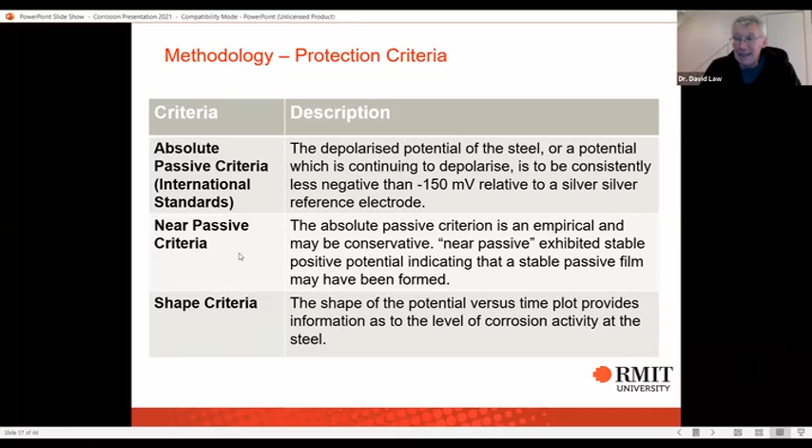However, what we also looked at is whether they were getting near to this minus 150, but also if they were maintaining a positive trend and they weren't actually starting to fall back down. So even if they hadn't reached the minus 150, whether they were near it and maintaining it, to say that we felt they were still in a passive state, even though that was not what is specified in the international standard. But this we felt is indicative that they are still maintaining it, because if they're going to start corroding, we would expect the potentials to start to drop again.

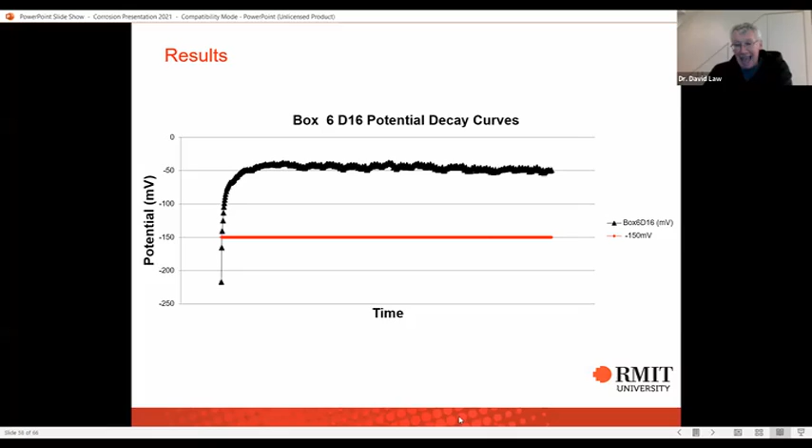So this would be the sort of thing that we would see. So we can see here, here's our minus 150, and this was in the D16 beam. And so it goes up, and while it moves around a little bit over time, you can see here it's still well above the minus 150, and there's no indication that this is really starting to drift back down, or any indication that corrosion is occurring.

This is another one that we've looked at. You can see here there are some ups and downs. These may be due to tidal action or environmental effects, but overall you can see that it's still really in an overall drifting up of that potential, and the potential's there, very positive. So this would be very indicative that we do get residual protection in our structure.

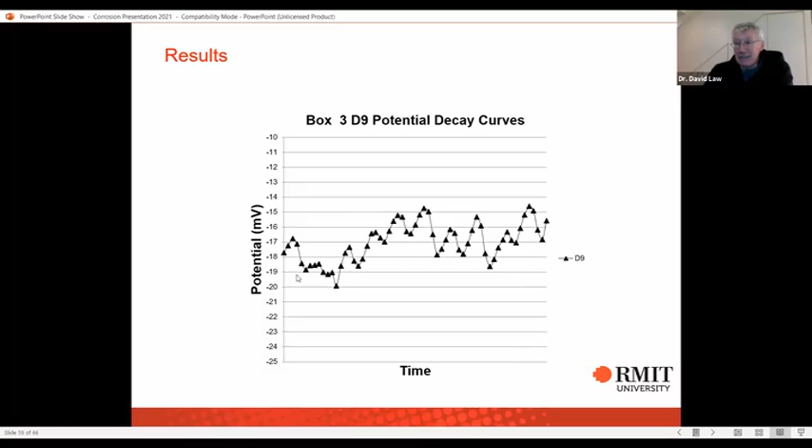Here, however, is the sort of thing where we would say we've lost our residual protection. And you can see here, it moves up, and then for a period of time, it's still maintaining that. So this is where we would say it's near passive. It's not managed to achieve the minus 150, but it's been drifting up, and it's been happily maintaining that upward drift. And then we suddenly get this drop, and it's dropped back down to a lot lower potential again. And this would indicate where we've lost that residual protection.

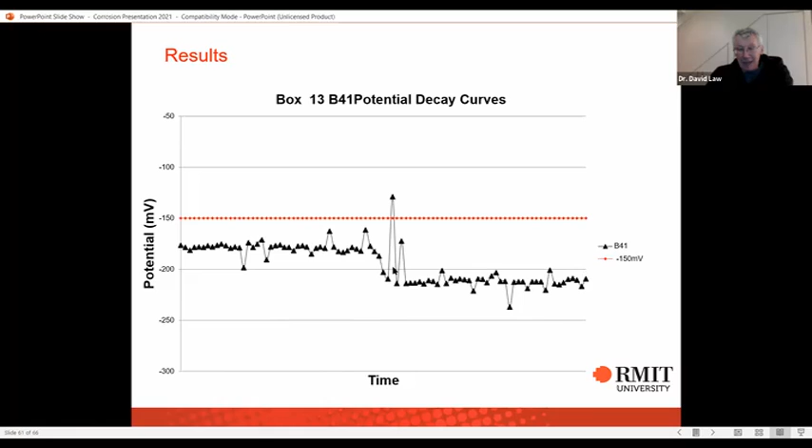And why do we get some that fail after a period of time? So we looked at the elements, and we could look at the beams, the deck, the front beam, the back deck, and the back deck wall, and the fender beams when we looked at it overall. And we can see it was distributed fairly evenly amongst those elements. So this is the total amount of elements that we looked at for each of those.

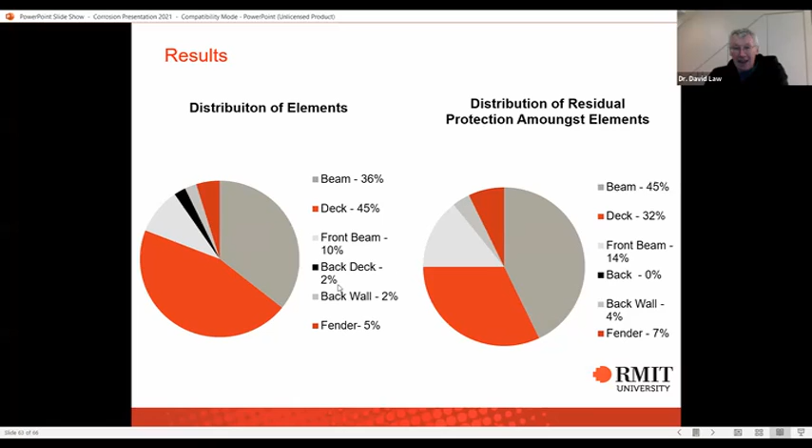So of the elements that we were able to look at, 36 were beams. Out of the elements that actually showed residual protection, slightly more of the beams showed residual protection than the deck did. But overall, there was nothing much other than the fact that the back deck failed and didn't show any protection at all.

The other thing that we noticed is along the length of it. So this would be the more landward side of the structure. The land is here, and this would be more exposed to the tidal action at the end, because this is going out to the end of the dock, out of the harbour towards the edge of the harbour. And you can see here, these are where we saw most of our failures. This would suggest in the more environmentally exposed, more aggressive regions, that we lose that protection very quickly, or we don't even see it.

So it does seem that in those aggressive environments, we don't see that residual protection. That would suggest, we think, if we've got sheltered zones, and this might be analogous with, say, de-icing salts, even though this is in marine environments, we can expect to see residual protection. But in those very aggressive zones, we struggle to maintain residual protection or see it at all.

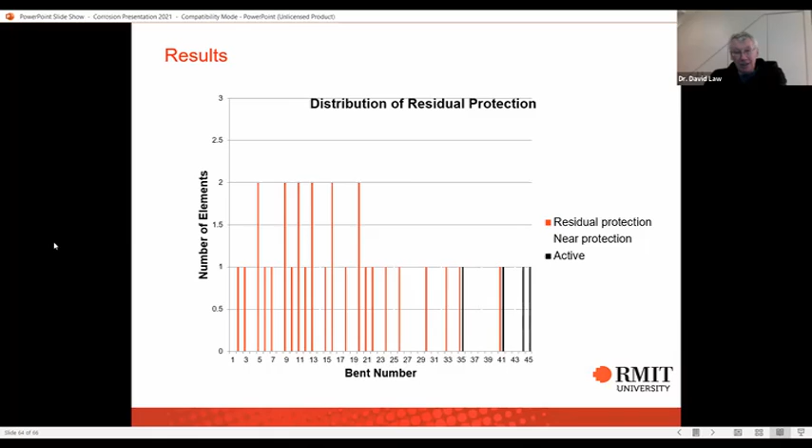And again, this would suggest in the sheltered zones where it's not an aggressive environment, we may possibly be able to use that hybrid system well, but it does perhaps raise a couple of questions, in these very aggressive zones, about how long or how well that hybrid system with the residual zinc is able to protect it. These are areas that we're going to look at going forward on the rehabilitation of those structures and the residual protection.

So out of that, we were able to see the majority of the elements had some form of ongoing passivity, which is presumably coming from those secondary effects from the cathodic protection. So it's both the passive environment due to the CP and those secondary effects. It was in the less exposed environment, but it didn't really run specifically across the types of elements,

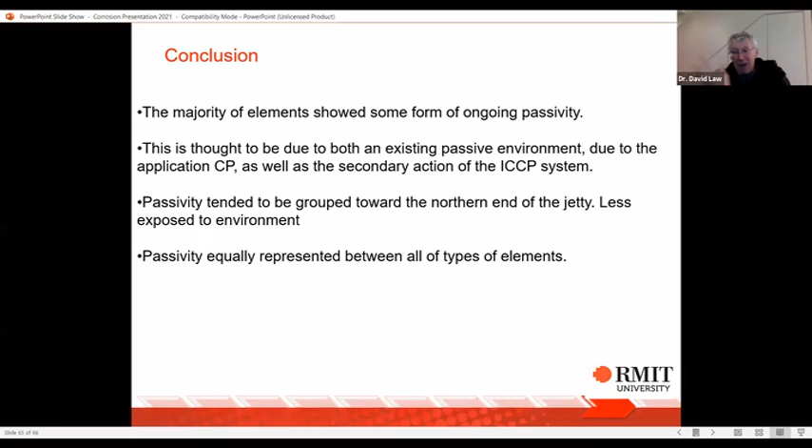other than that one type, the back deck element, for some reason was not being protected, and that is perhaps because the tide just comes in and is always hitting that back wall continually. It may be a very aggressive environment, always having the tide splashing against that back wall, and perhaps that is why we weren't seeing any residual protection there, which again would suggest it's very much about those aggressive environments. So that again is the sort of thing that we saw.

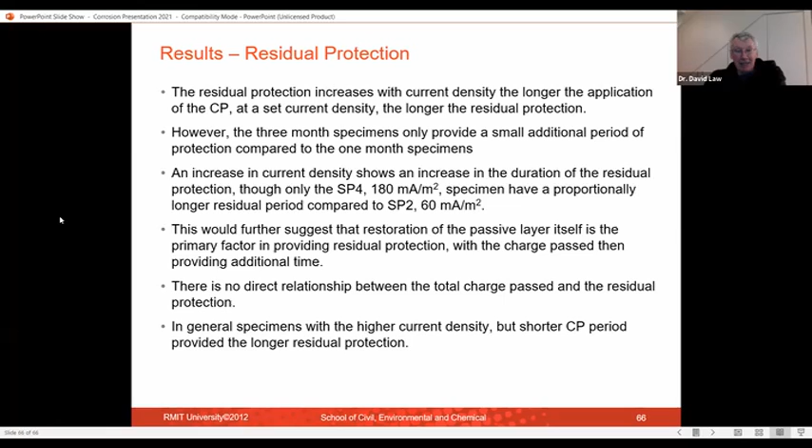It increases with current density, so the bigger the current density that we can put in, obviously the longer it will protect. That would suggest the longer that we've had it on, the more protection you could expect from it. So these are the conclusions from the first one. There was no direct relationship between the total charge passed and the residual protection. That slide should have been earlier, I'm afraid.

So that's the talk. Hopefully that's been helpful, and everyone has learned from that. So thanks a lot to everyone. And if there are any questions, happy to answer them.